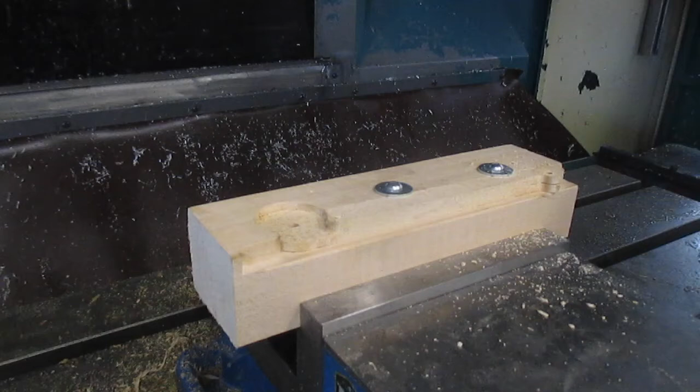Well, as expected, the 10-32 threads in the maple didn't make it through the 100 parts. So here we are with one of them stripped, and I need to put in an insert so I can finish these and finally get these done.

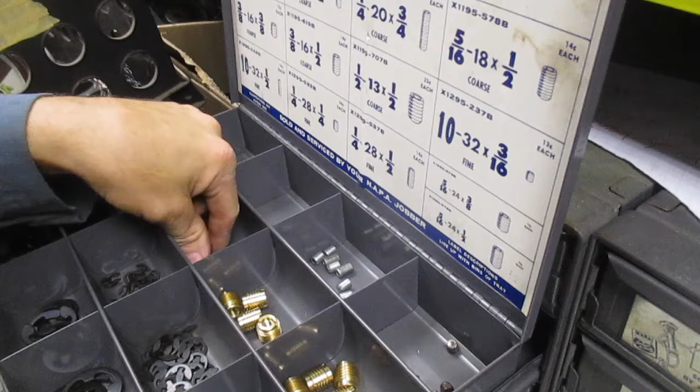And I figured, not a problem. I have some inserts, and so I went to the parts bin and looked like I had what I needed, but I had one size that was too big, and one size that was, of course, too small, and so I'll have to come up with a different solution.

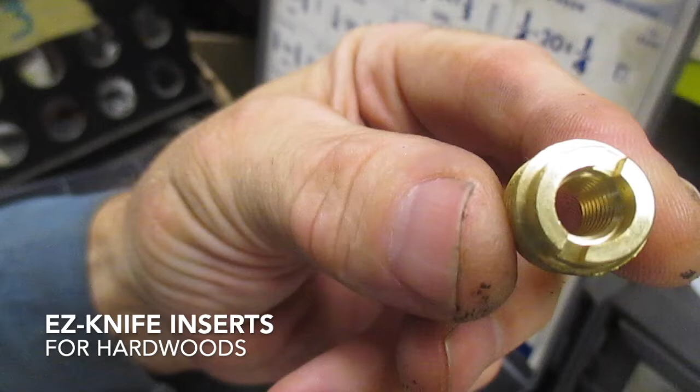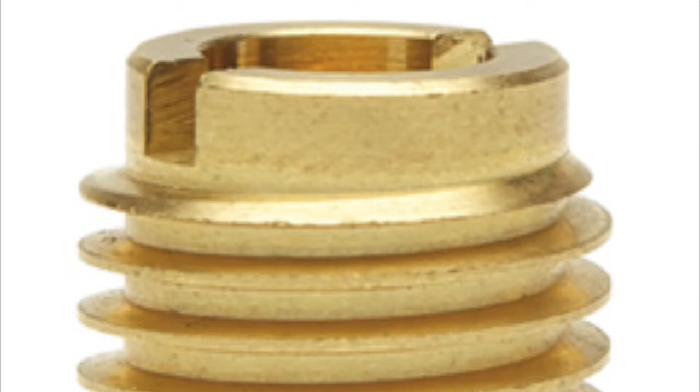So let's take a minute and talk about these EZ-Knife brass inserts. They are made by EZ-LOK, and they are designed for use in hardwoods like oak, cherry, and maple. The inserts are ideal for use whenever assembly or disassembly could lead to thread erosion or stripping.

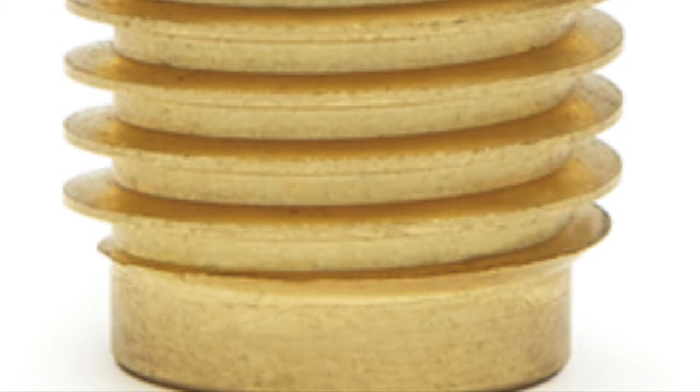The EZ-Knife thread inserts for hardwoods use a proprietary external knife thread that slices into the wood to provide superior holding power. They're often machined out of brass, but they are also available in stainless steel for additional corrosion resistance.

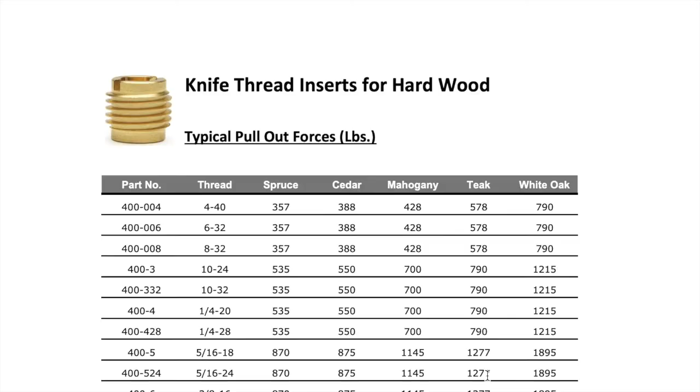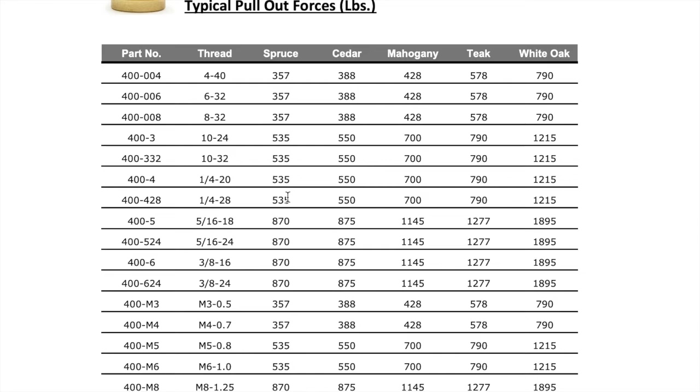The pull-out force for any insert is dependent upon the material that it's installed in, and these inserts are no exception. And you'll see here on the pull-out chart that even this little 10-32 has a pull-out range from 500 to 1200 pounds.

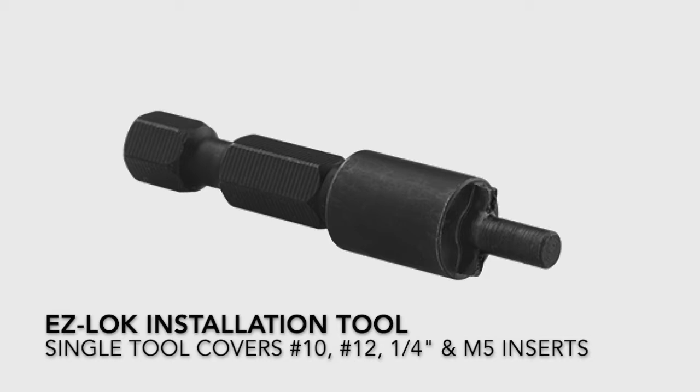Of course, I do have a set of inserts that are intended for steel and aluminum with thread locker. These will work for wood, but I'll have to take the additional step of actually threading it to make it work. The inserts can be installed with a flat blade screwdriver, but I'd recommend spending the $10 to pick up the EZ-LOK driver if you're doing any quantity of these. It's very quick and foolproof.

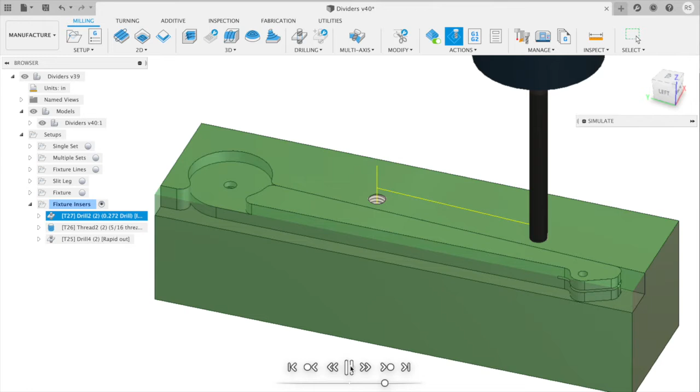The inserts were then added to the 3D model of the fixture so that the paths could be programmed in CAM. The operation consists of three tools: a letter I drill, 0.272, a thread mill, 5/16-18 thread, and finally a chamfer to break the edge.

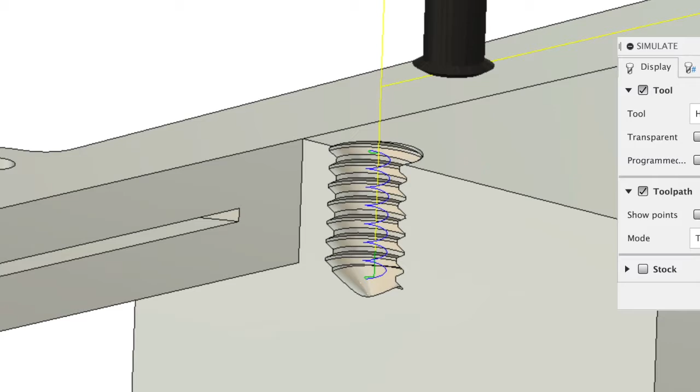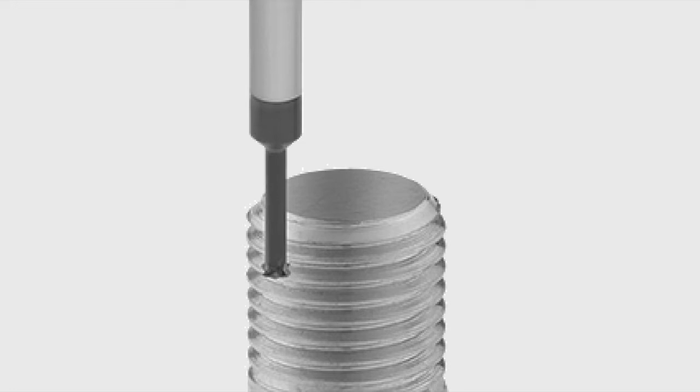Thread milling requires three axes to move simultaneously, normally X and Y in a circular motion, and the Z axis will follow the pitch of the thread. This is normally referred to as helical interpolation, the machine's ability to move in a helical motion or in a helix. Thread mills are great for blind holes. They can also do inside and outside profiles with a single tool, both right hand and left hand.

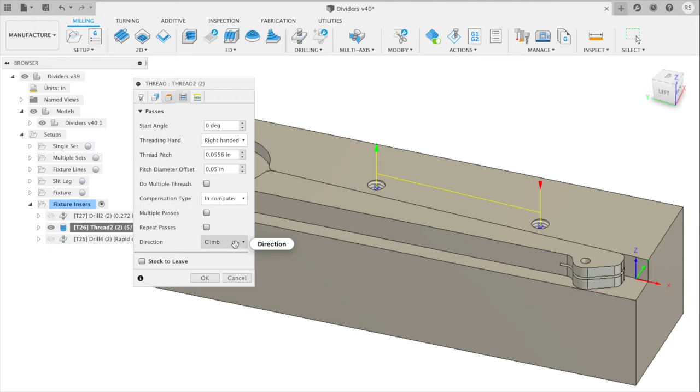When setting up your thread milling operation, it's important to spend some time on the passes tab. Make sure that your thread is set for right or left hand, that your pitch is set correctly, and that you have your correct diameter offset. Additionally, you want to set your climb or conventional milling. Typically on an ID hole, you'll climb out of the hole. That's how I remember it.

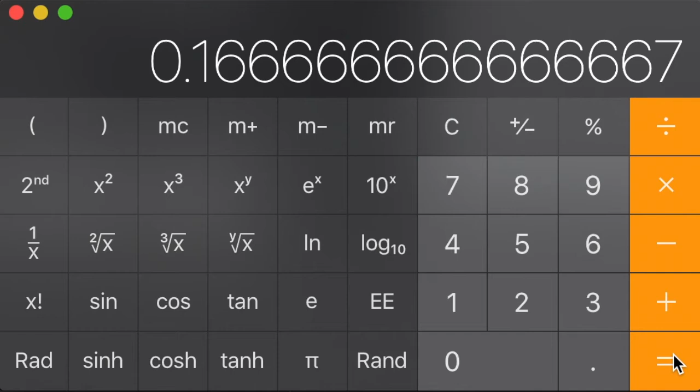Inch threads are typically called out as threads per inch. In this example, we have 6 threads per inch. To calculate the pitch of the thread, or the distance between the crests of the thread, take 1 inch, divide it by the number of threads, 6. This gives you the pitch of the thread, 0.1667 inches. It should be noted that metric threads are a lot easier because they're defined by their pitch. No calculation required.

The machining is pretty straightforward. Start by drilling your two holes. Here it's a letter I. It's a 0.272 inch. It's running at 4,500 RPM. Next comes the thread mill. It's also running at 4,500 RPM. It will start by dropping to the bottom of the hole and then slowly helix out at the feed rate.

I'll try to zoom in a little bit closer so you can see the helical motion of the cutter. It's going in a circle and coming up at the same time.

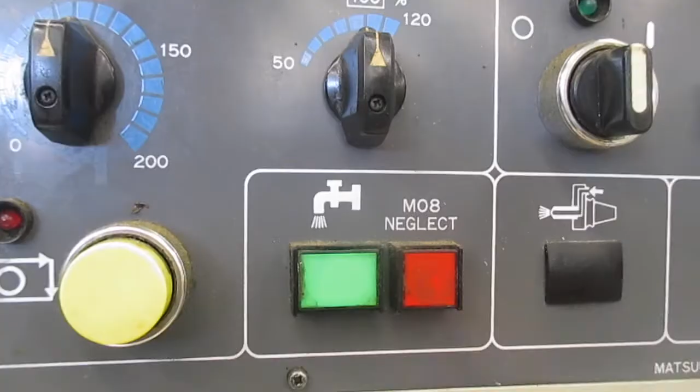When I set up this job, I grabbed this chamfer tool from the library, and the coolant setting is actually in that definition. And I didn't turn off the coolant, and it started flooding the machine.

I'm installing the inserts using a battery-powered impact, and it's just important to come at it slow, make sure you're lined up nice and straight. The first insert went in really good. The second one, you can see I'm crazy crooked, and I tried straightening it out, but I don't know that I got it dead straight. So something to definitely watch for.

With the inserts installed, it's just a matter of installing the next part and reassembling the fixture. And here you can see I'm just putting in the last screw. Now it's time to get back to work. About 60 or 70 more parts to go.